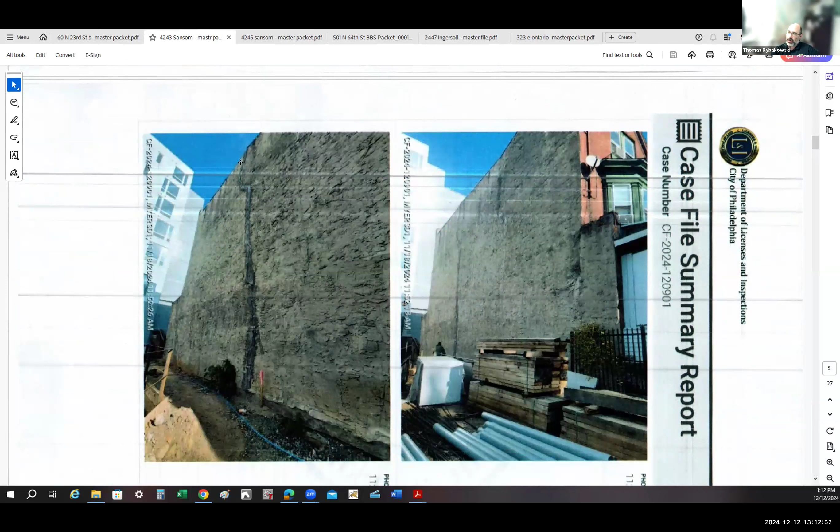Okay, so this is the property here, the photo on the left-hand side of the screen. This is the property at 4243 Sansom. This is the side wall of 4243, but the side wall of 4245 is the construction site, and the fracture runs from the foundation all the way through, up to the roof line of the property.

Tom, that construction site, what are they building there, a new house? It's a large construction site with an issued building permit that covers multiple parcels.

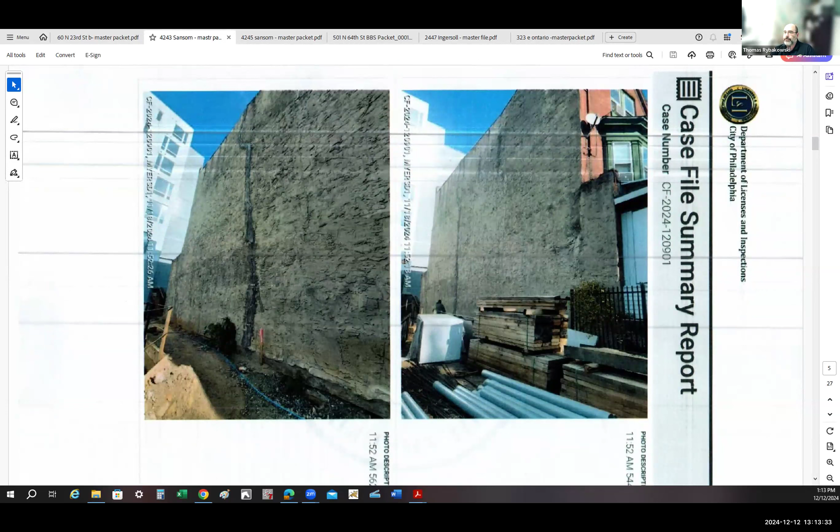Okay, that wall on the left-hand side that I'm looking at is fractured from the top to the bottom. Is that connected to the house next door? I don't see -- it is a house next door. It's the party wall between 4243 and 4245, which is not the vacant lot, but the active site. Yeah, uh-huh, okay, all right.

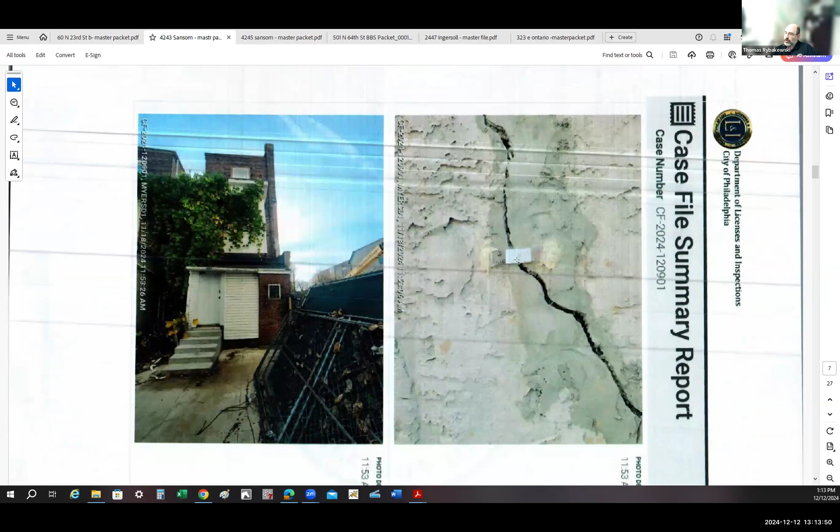Another illustration of the property and the fractures that are going on with that wall. And then you can see that there's a monitor on the fracture.

And then this is a close-up of the view at the roof line with a copy of the posting. I'll spin it. Tom, do you have a picture from the other side of that wall?

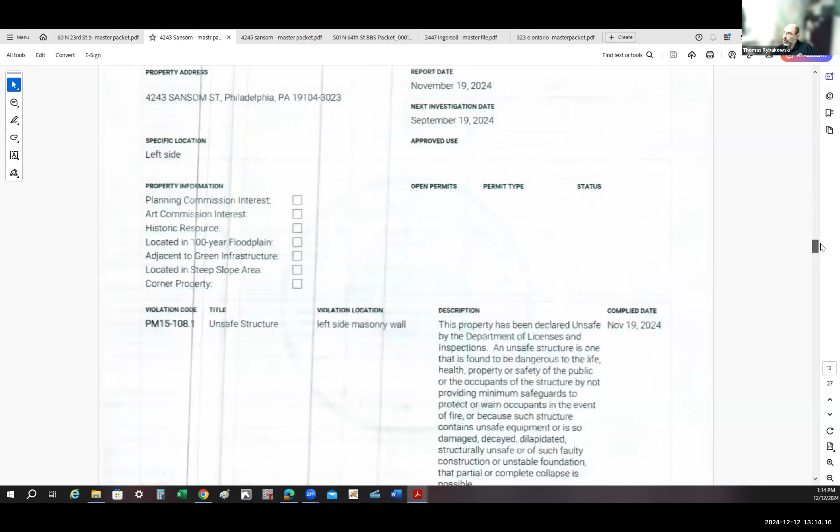That would be included in a report that the department received, and I believe it is part of the packet that is going to be brought into the matter in front of the board.

Okay, so essentially what we're looking for is the permit for the repair of 4243, which the department believes would satisfy the repair of the party wall of 45. I believe it's a matter between both property owners, but essentially we would be looking for a permit to be issued within 30 days for the repair of the property.

Okay, all right. Can I ask you a question? So the crack was there prior to construction starting? Yes. And then what construction had been done that it is now widening? Or do we think it's just a temperature change?

All we know is that the department was notified by the construction company doing the work out there that their crack monitoring equipment made them aware that there was movement and the crack was widening.

Tom, it appears that there was some patching of the crack at some point in the past. Was that done by 43 or 45, and has that happened during the time that the construction has been ongoing next door?

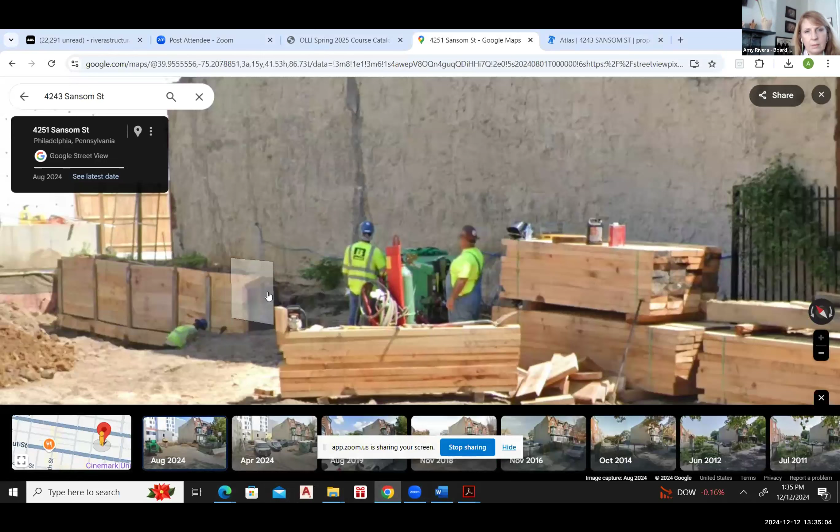Here's April of 2024. It looks like you're setting up for construction. In August of 2024, here's where that pavement was. This has been taken down. This soil has been excavated down. They are right up against her wall. Again, if this is just a crawl space, that wall's not very deep. You can't tell me that this has not potentially undermined it, subjected it to frost heave.

So you are not 8 foot away there. No, ma'am, we didn't say we were. We said we were 4 feet away. No, 8 feet. No, the new structure is 8 feet. We split the difference with the shoring. It's 4 feet. What is this darkened substance I'm seeing?

So the area, that building, and again, you'll see this if the engineer's report is presented, that building is a full basement. All the way to the back? Yes, all the way to the back. Right approximately where the gentleman is at the lagging wall bent over is the approximate location where we came across that piece of concrete.

The exposure that you see adjacent to the parging, or below the parging, is the remnants of the parking lot that was there, the parking lot and its sub base. So it is down a little bit, let's call it 1.5 feet or so. That was the sub base. We didn't excavate behind the wall, we're just doing a regular lagging wall installation there.

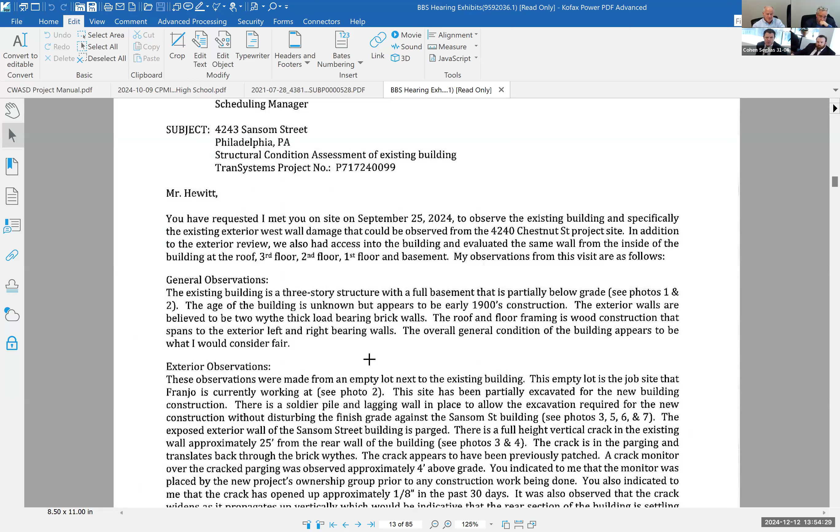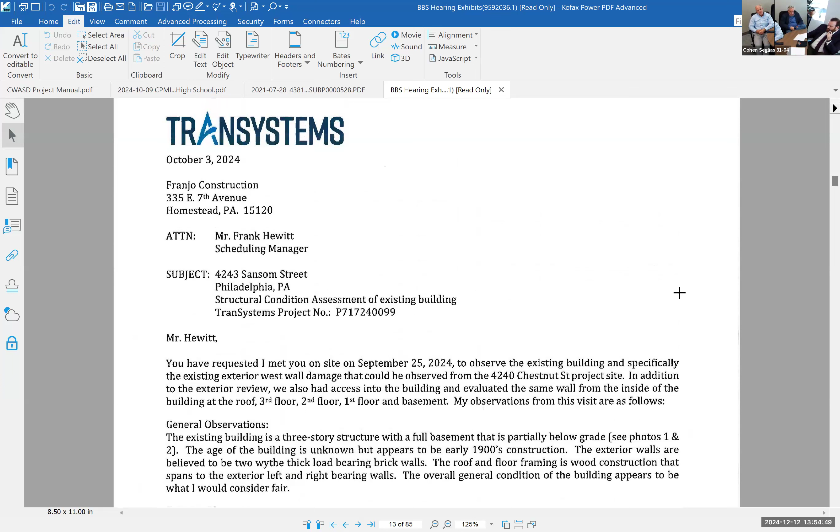Mr. Hewitt, this was submitted upon your request, correct? Or on behalf of Franjo? Frank, Frank - sorry, yes, yes. This is an October 3rd TranSystems report. This was uploaded to L&I upon the request of the inspectors at that time who came out after the crack monitoring. It goes through the general observations of the building, exterior and interior observations.

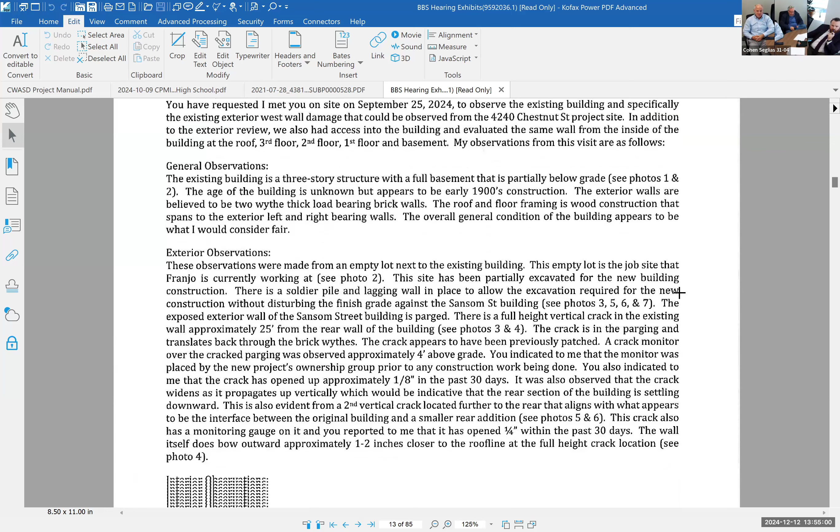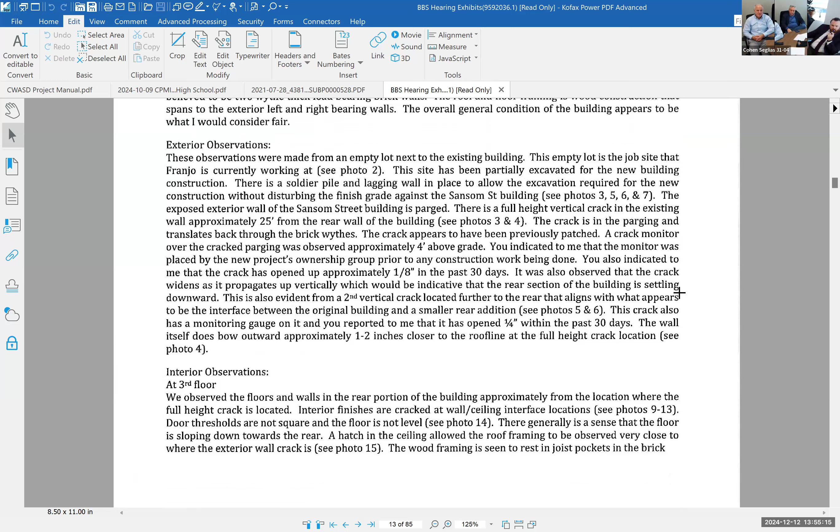Full height vertical crack in the existing wall, 25 feet from the rear of the building. Parging translates through the brick. Crack appears to have been previously patched - that's where the monitor was established. The crack propagates vertically to indicate that the rear of the building is settling downward, meaning to the rear.

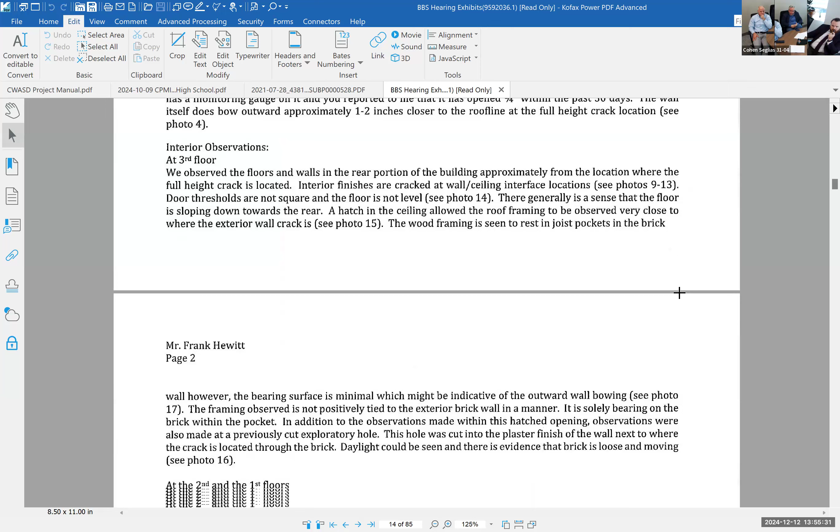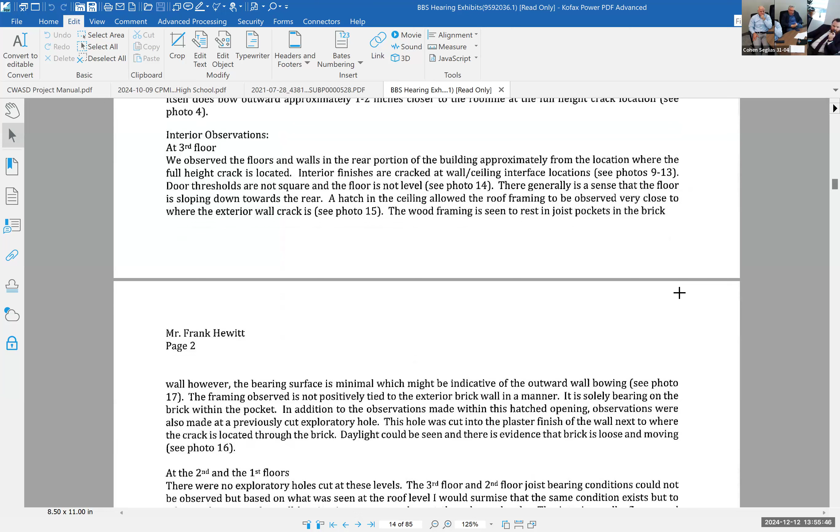Interior observations also included floor and walls in the rear portion of the property where the crack is located. The finishes, meaning the meeting of wall and ceilings, are cracking where the rear of the property is sagging. And we'll see in the photos at the end, there's actually where they did a cut through into the plaster to see the exact location of the crack from the interior at the roof line.

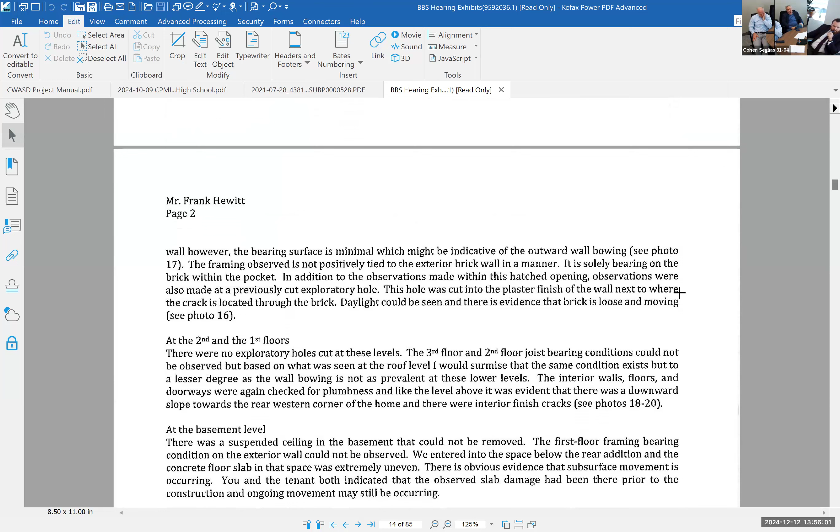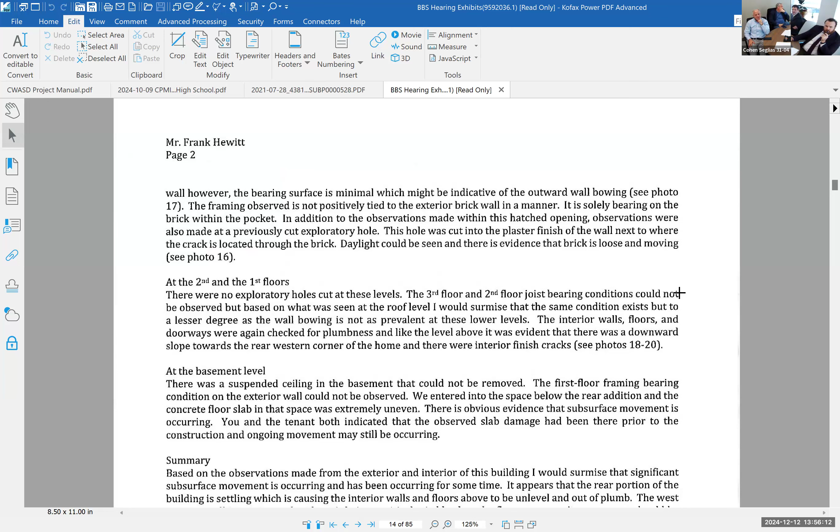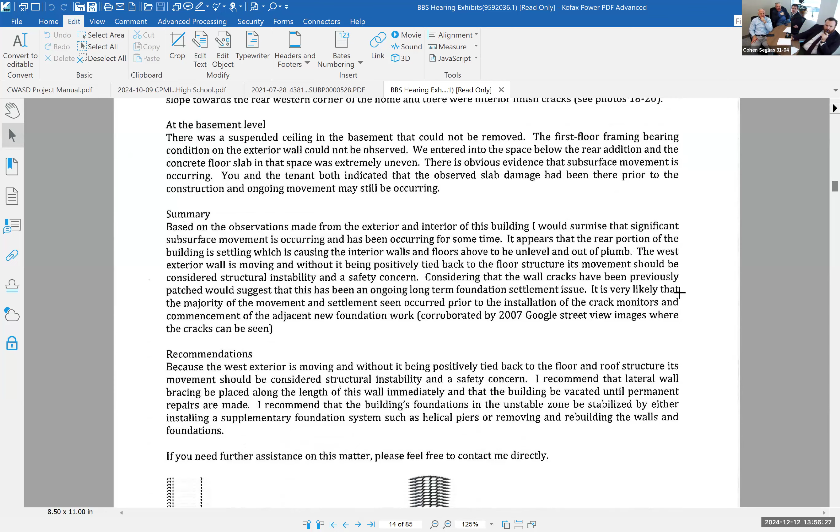The framing, obviously, in a structure of this age, since it is not with ledger boards, is pocketed, so it's not positively tied. And I think, as you will see in the pictures as well, they're not fully pocketed anymore. So if you just want to go through, that's the summary of the analysis: significant subsurface movement has been occurring for some time. Rear portion is settling, interior walls and floors.

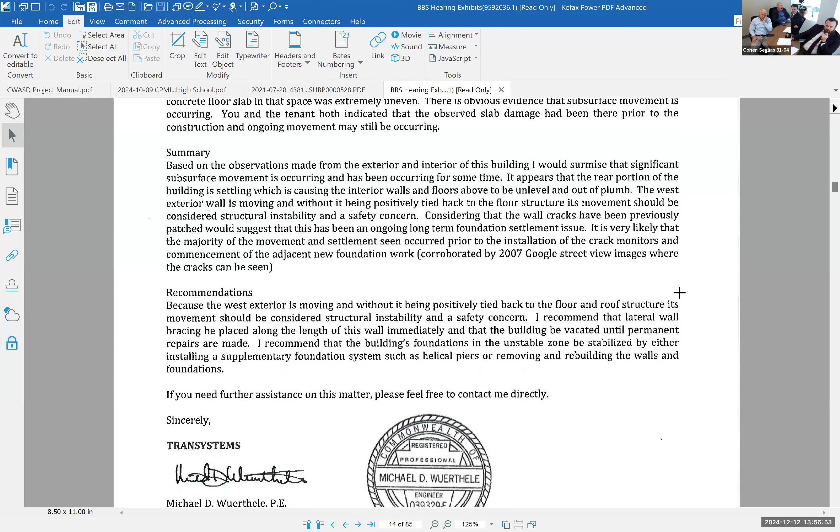Their recommendation was lateral wall bracing at the rear, vacating until repairs can be made. Foundation is unstable, and they were talking about helical piers and grout injection, I believe, was what was proposed, would be a solution to that.

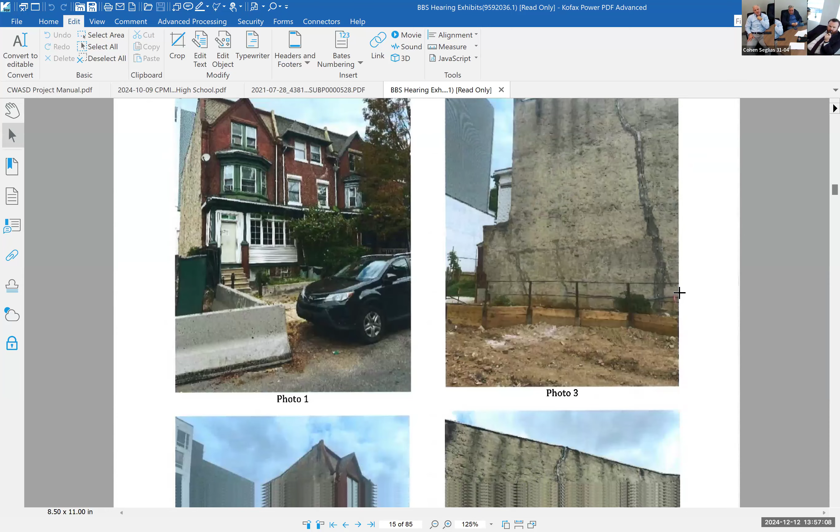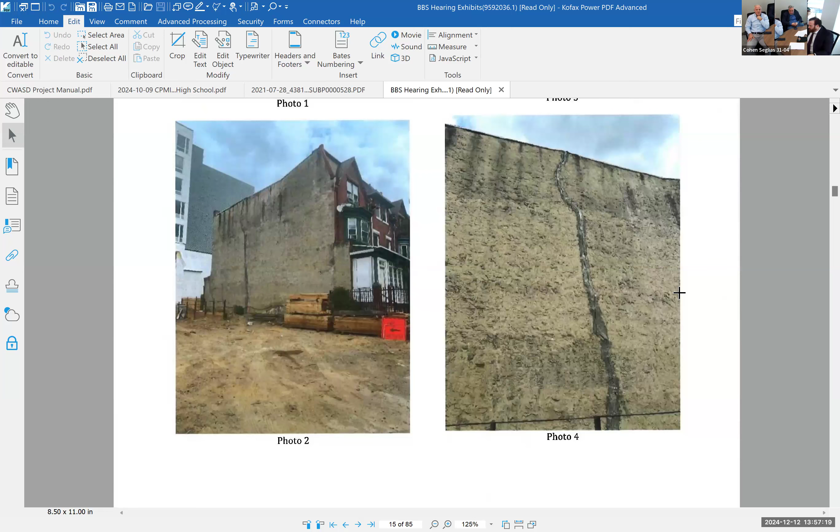If you go down to the photographs, similar to what the city has proposed, that's the front of the property. There is the rear along the shoring line, with the crack. Again, I don't know, Brian, can you zoom in to see if we can zoom in on photo one? The left, photo two.

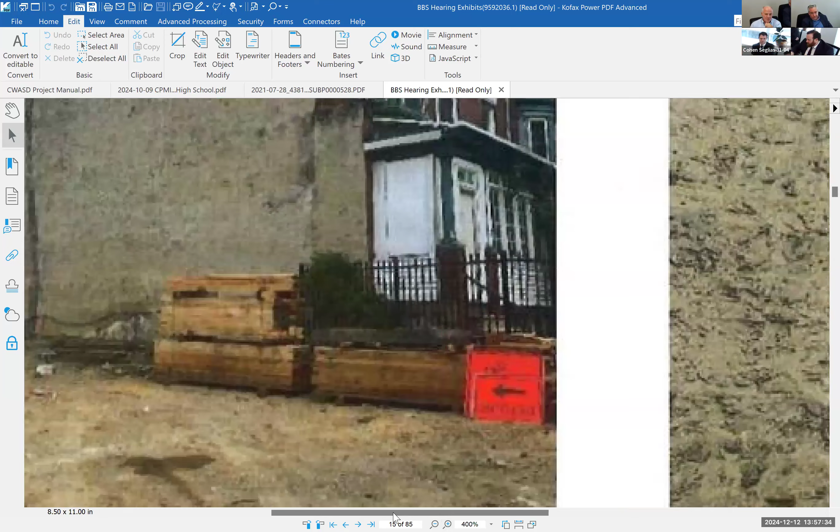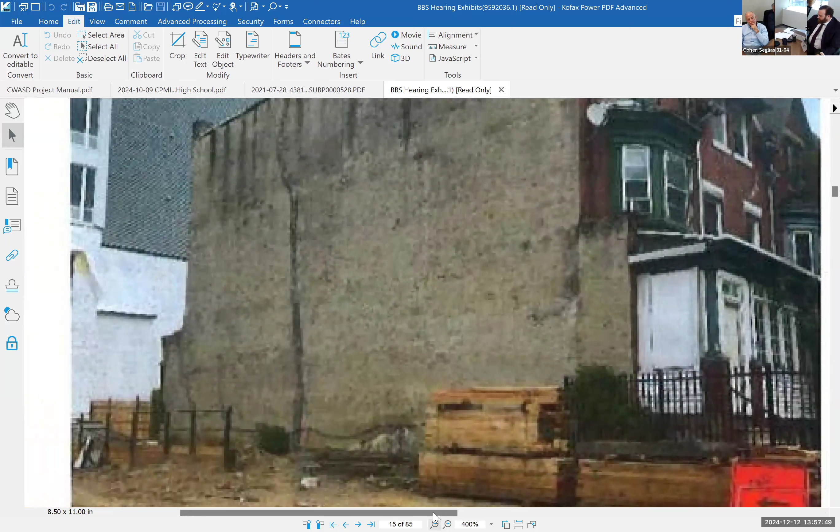So that is the crack, that is the shoring wall that was installed there. The grading and movement, the excavation of the foundation is obviously to the left of this photograph on 4245. The vertical crack there going down, let's see. You can see the secondary crack in the rear towards, I guess, what is that? Chestnut. Yeah, the Chestnut, that little outcropping wall, there's a secondary crack at that location in the same direction of the sag. Here's the rear of the property.

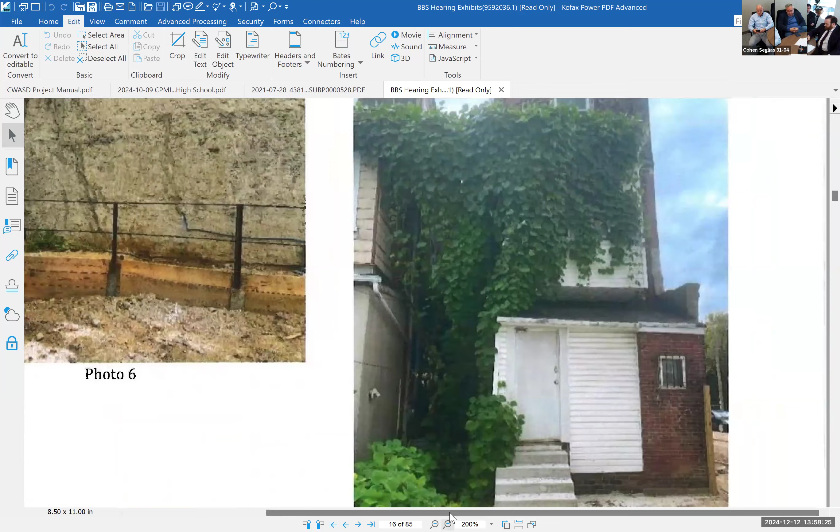Can you zoom in on that as well? Looking at the rear of this property, you can see at the time that this is existing improvements. The shape of the roof line itself is indicative of the fact that that sag has been there a while, because the millwork around the exterior rear door has been cut and trimmed, as has the siding, to show that existing sag. That's the door itself has a

Full height trim at the top on the left and is barely trim on the right, same as for the siding itself. So that's indicative of a pre-existing condition that's been there for some time when that work was done. I don't know when that exterior work was done.

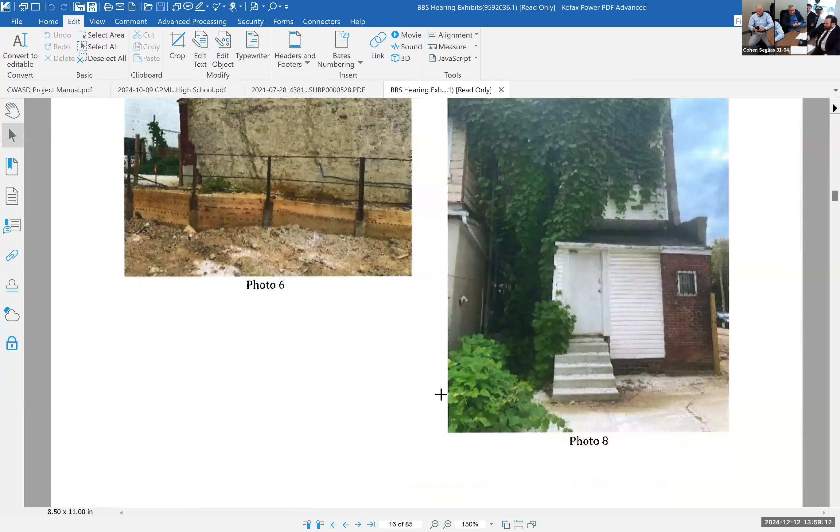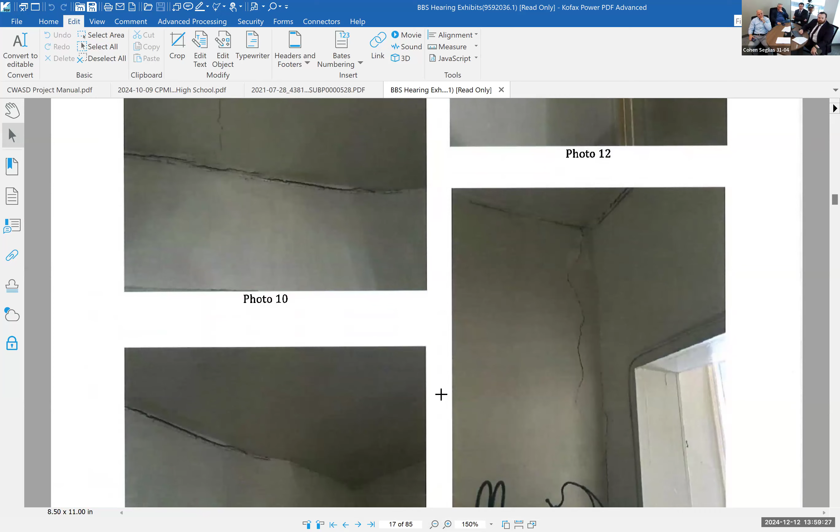If you go down further from here, I believe it goes into the interior of the structure, showing the existing cracking along the interior walls at the rear of the property, both vertically and horizontally throughout the rear. We have no idea what this property looked like prior to going in here. This was our first foray, obviously, into the property.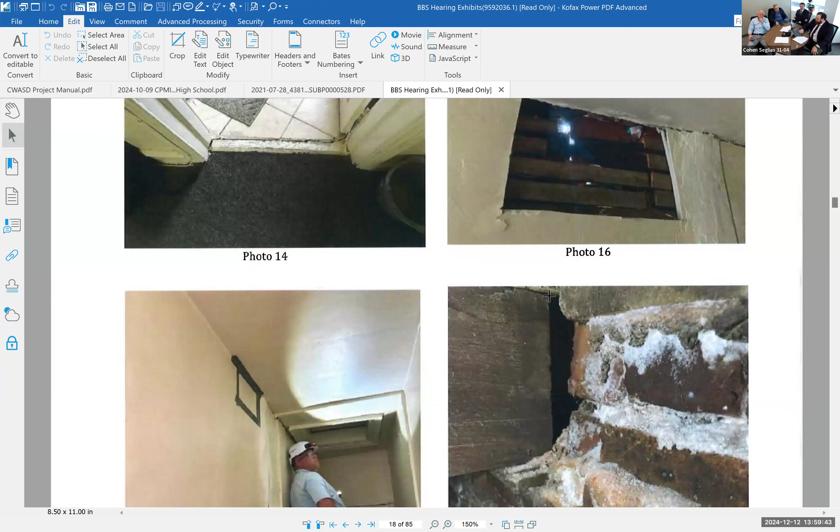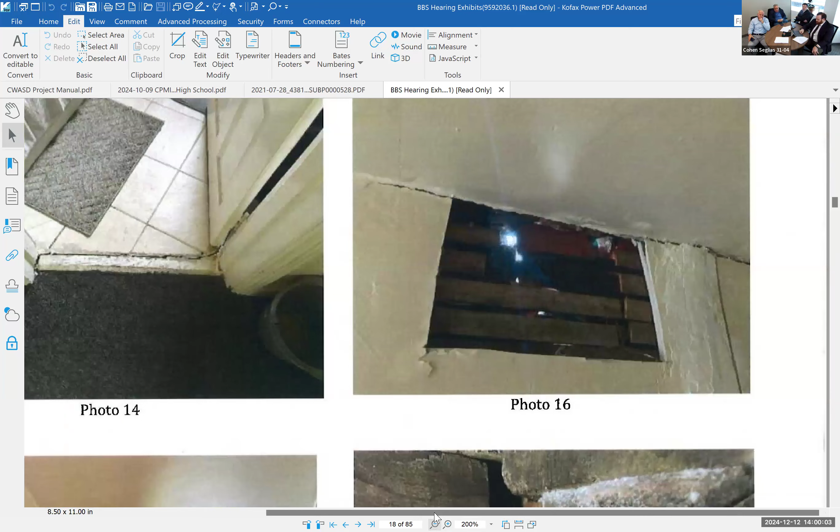That is the cut that was made in photo 16 through the plaster. And you can see the light. This is exactly at the point where the existing vertical crack runs to the roof line. You can see light through there at the very top of the crack at the roof line. And then if you scan further down, you can see what is evidence of displaced joists that have come out of their pocket.

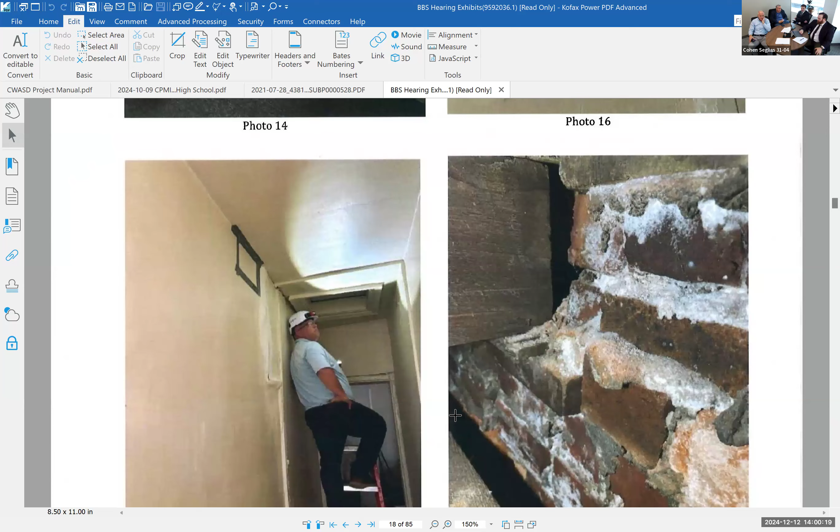Again, this is existing conditions, but that is not a fully seated joist. Is there anything after that? What's the last one that just shows further sag as the rear drops off?

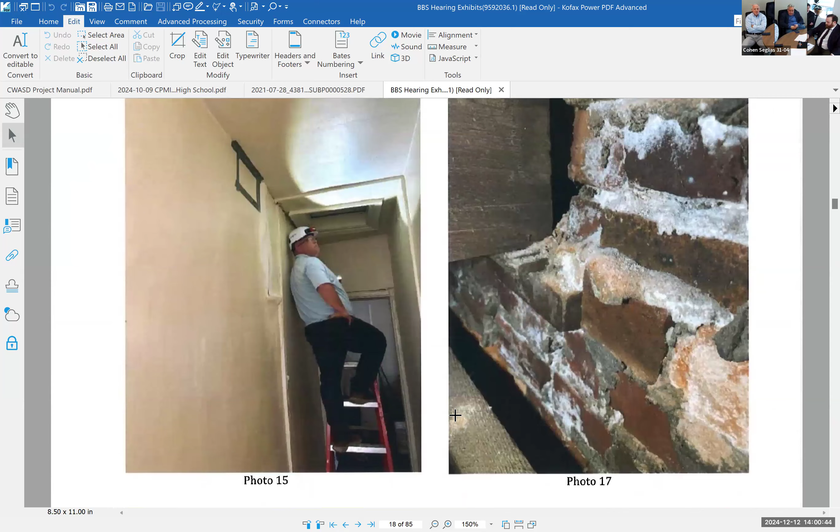So this was done at the beginning of October after consent was given to gain access for the engineer engaged by Franjo. And this report was submitted and has, I guess, been circulated to Mr. Coe, but is also available for the department on the Atlas system, or sorry, the Eclipse system.

Was the sheathing and shoring designed? Frank? Yes. So I apologize for the lag in response. We're next to a train track, so we mute by habit, so it takes me a second, sorry. So an engineer designed the sheathing and shoring? Yes. Okay.

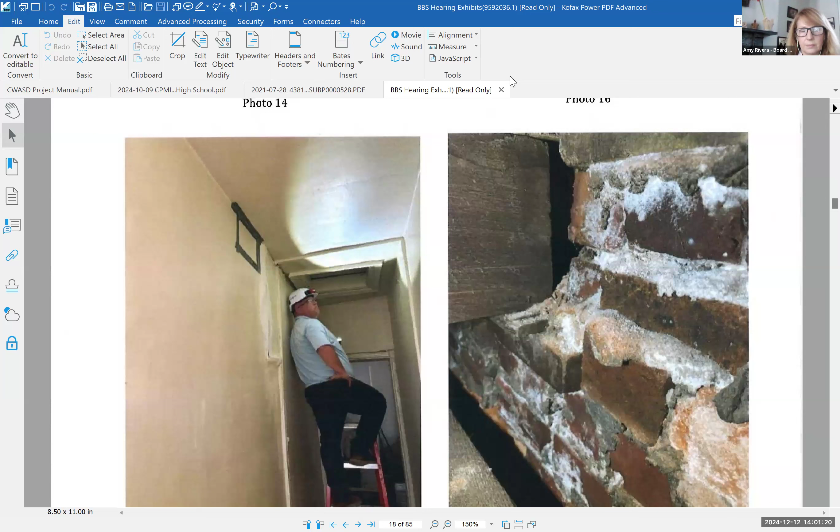All right, Wayne, do you want to caucus? Yes, I do. Okay. All right. Okay. One second here.

Here's our decision for 43 and 45. You've got 30 days to make safe, to get a make safe permit before you start the work. Also, the rear foundations that were dug up need at least 3 feet of earth cover to protect them from frost heave. So you guys need to work it out. You've got 30 days to get a make safe permit, and it's on both of you, 43 and 45.

Just to clarify, that's 30 days to apply for a make safe permit, to have it entered into the system.

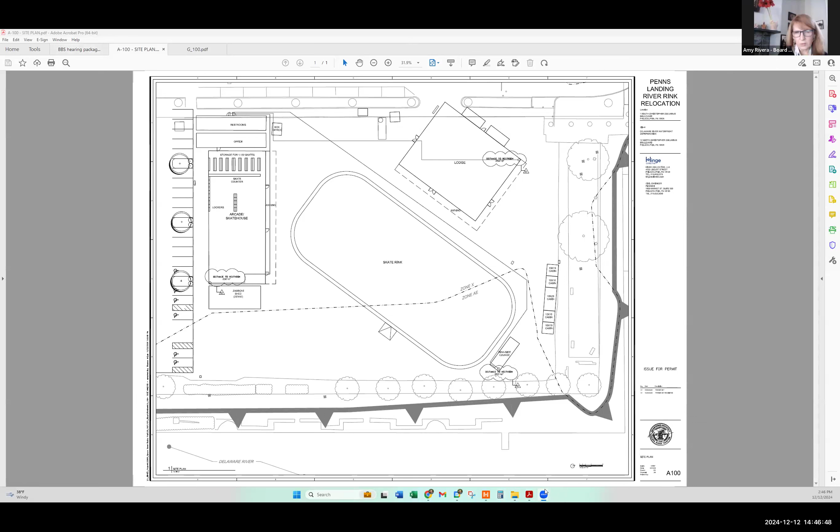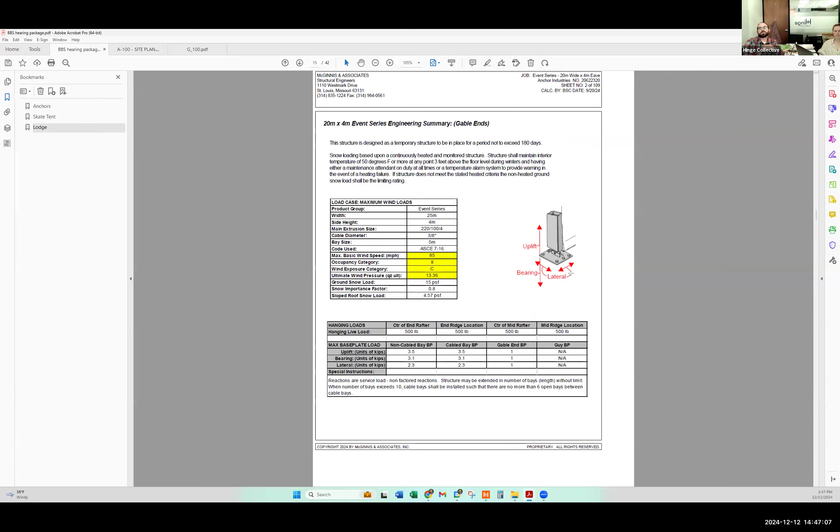And sorry for the trouble, Lizzie. Do you happen to have the pretty pictures? I do. Do those drawings show how they're holding them down? No, but this full set—this is actually even just excerpts from the structural drawings. This does have the full level of detail for structural compliance.

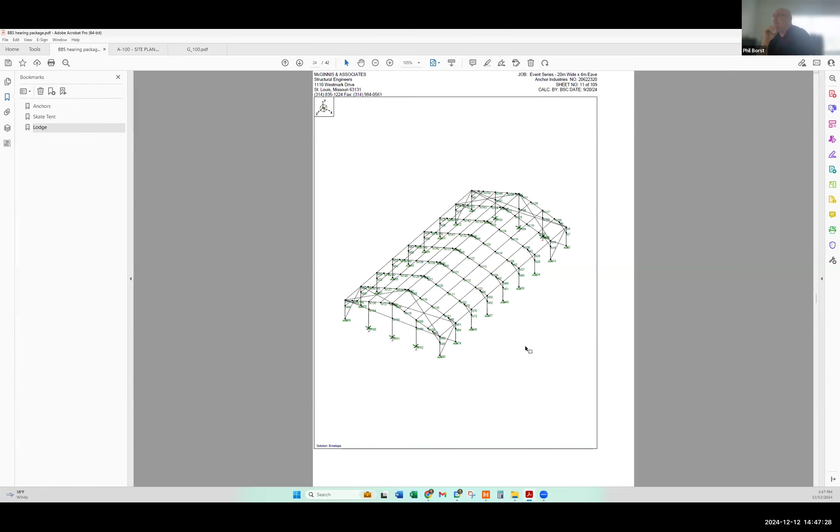And these are all in the Eclipse system if you want to review them in more detail. Yeah, please forgive me if we're not presenting as clean as you need for your time frame. No, and some of these tents have been up for a while already.

Yes, ma'am. The Lodge tent existed further south for the river rink for the past 12 years. We relocated it to the new position, and then the Arcade Skate House is a new tent that we purchased and put up from the same manufacturer, the exact same manufacturer, same spec, everything.

Were other variances required when these were put up initially? No, sir. Okay. No sir, it's just that I think with this go around, when we went in for L&I's approval, they wanted to clean it up a little, and they guided us through the process, and we spent about 8 to 9 months going through the approval process. And we got through, we got all the approvals. We were able to open, but we're currently open under a temporary because of this appeal.

So Matthew, did you review this? No, who did, which one? Because there's several applications, so I'll have to check. Who'd you guys review it with? So Ari, do you remember the contacts you had? So, Shakir Cohen was one of the reviewers. I think Shakir Cohen was the reviewer for this particular submission. Yes, for this particular application. For the two being appealed you have today, any notes on that?

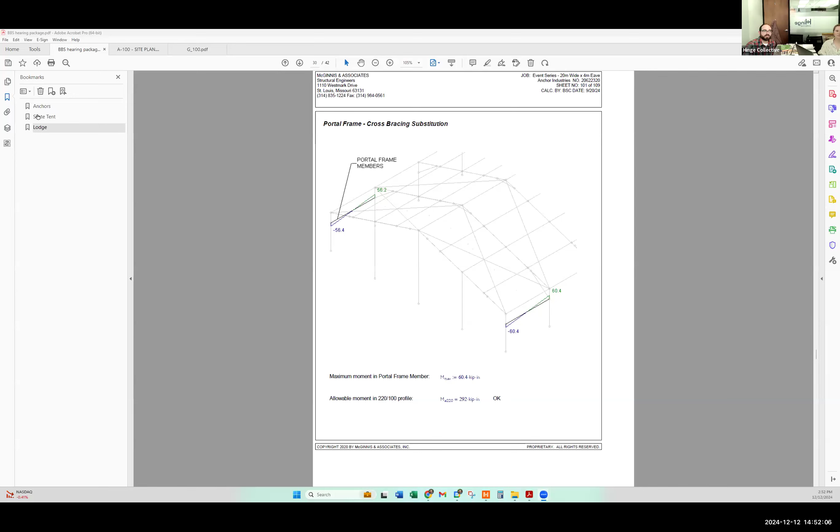Yes, I can answer that as well. They're anchored using these 3.5-foot spikes that also meet all of the wind load requirements when in a hard or dense surface, and they're anchored at every structural rib. So every rib of the frame has a column. That column has a base plate. That base plate has straps that bring down to the spike, and the spike is anchored in. It's like you said, 3.5 foot.

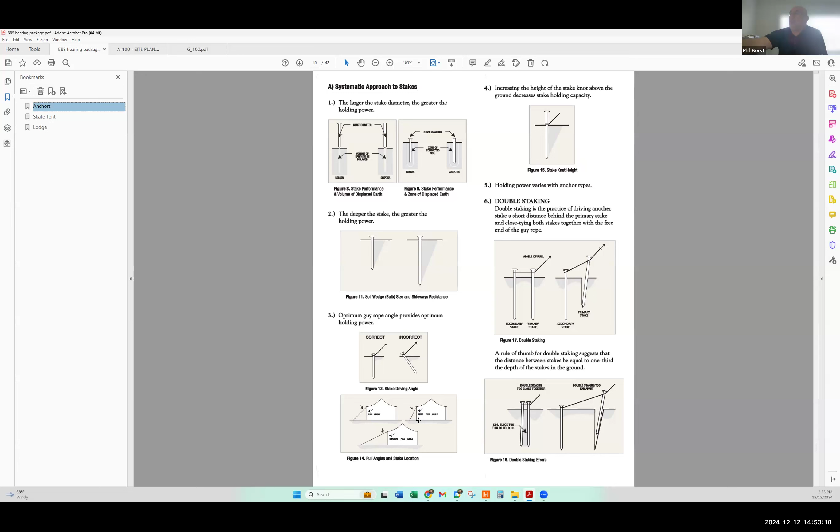So if you can go back to that image, that might help. There's like a double spike system here. Oh, and there's almost like guy wires also. Correct, yeah, it's in this fashion here. So the anchor plates are at the base of the column. If you look down at the lower left image where you see the tent, the anchor base that you saw, that plate resides at the base of the column. And then in addition to that is the spike and strapping that goes from the top of the column.

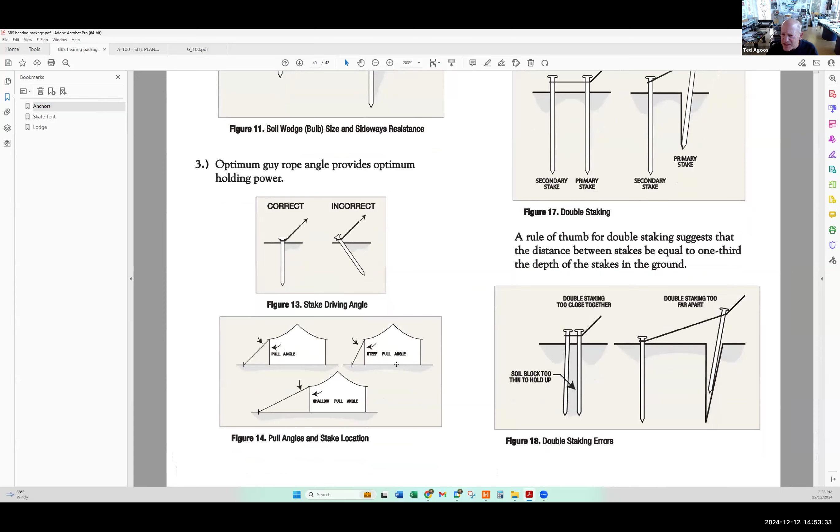Sorry, I was trying to zoom in there. When you were zooming through it, it looked like I saw 85-mile-an-hour winds as a sort of maximum, is that designed for? The pull-out capacity is 2,500 pounds in a hard or dense surface, which we would definitely qualify this as, because it's going directly into asphalt. That's only 2 inches worth of the 3 feet, but anyway.

And how much is the wind? What did you say, the wind's up to 85 mile an hour? Yeah, what's in his calculations? Somewhere in the front end it should say the wind speed that they designed for. Oh, are you talking about for the anchoring or for the structure itself? The whole structure, so it doesn't blow away. I mean, it will all funnel down to the anchoring, but I'm just curious if they designed it for the proper wind speeds.

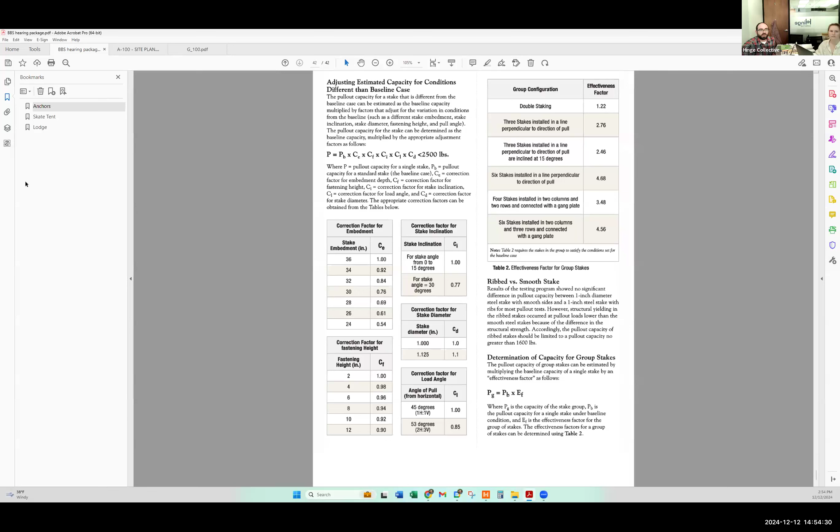Yeah, the uplift, yeah, the structure is designed for the proper wind speeds. The anchoring would be related to the uplift issue. And if they are 2,500 per anchor, then we're definitely exceeding that. Okay, I'm just looking for the wind speed at this point. It should be somewhere in the beginning. Yes, so if we go to wind speed.

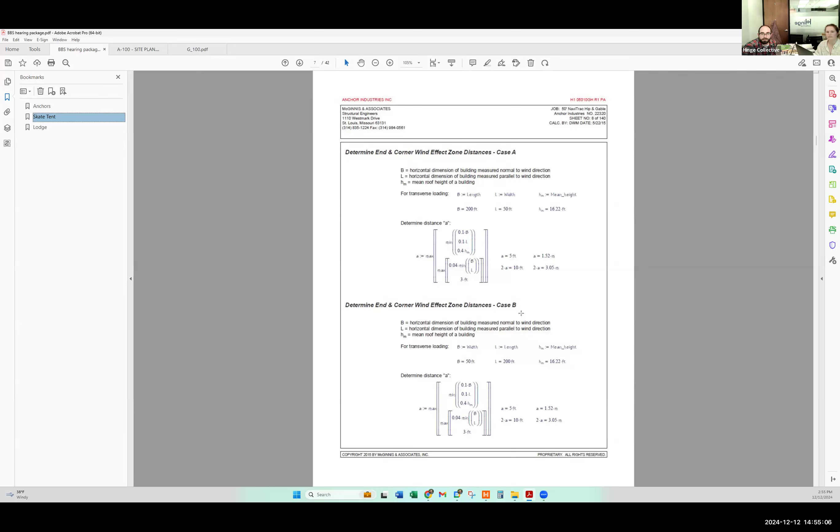There it is, the wind loads. Basic wind speed is 115. Okay, that's what I was looking for. All right, we good with it?

No, I think we should caucus. Okay, all right, let's caucus. Okay, sorry for the trouble, everyone. No problem, that's what we're here for.

Oh, they're back. Okay.

Is there anything in the report that says, taking the settlement issue into concern with the spikes and everything going through about 2 inches of blacktop? When you say concern, is it that there's gonna be something in the way? No, the settlement of the blacktop, right, Ari?

Right, the report that you showed, from what I could see, addressed wind loads and uplift. But your base plates are sitting on asphalt. You potentially have a snow load on them, a building load on a base plate that's sitting on asphalt.

Has that been signed off on by the engineer in the report? Are you referring to a geotech? That would relate to a geotech report, not, I'm talking about a base plate sitting on asphalt. A base plate that's supposed to be sitting on concrete is sitting on asphalt. Asphalt deforms, especially in the summer, it will deform. Has that been taken into consideration?

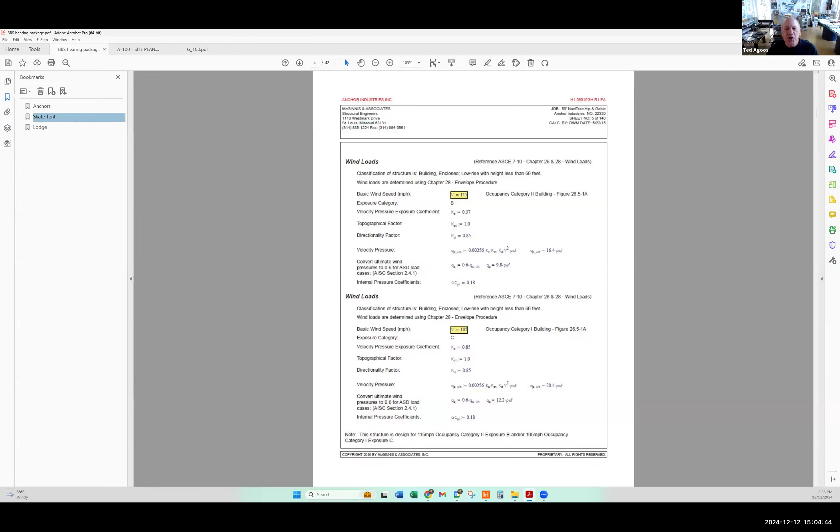So these tents, for example, they're prefabricated tents that get used all the time in different locations throughout the city. We're just using them for the purposes of these seasonal events.

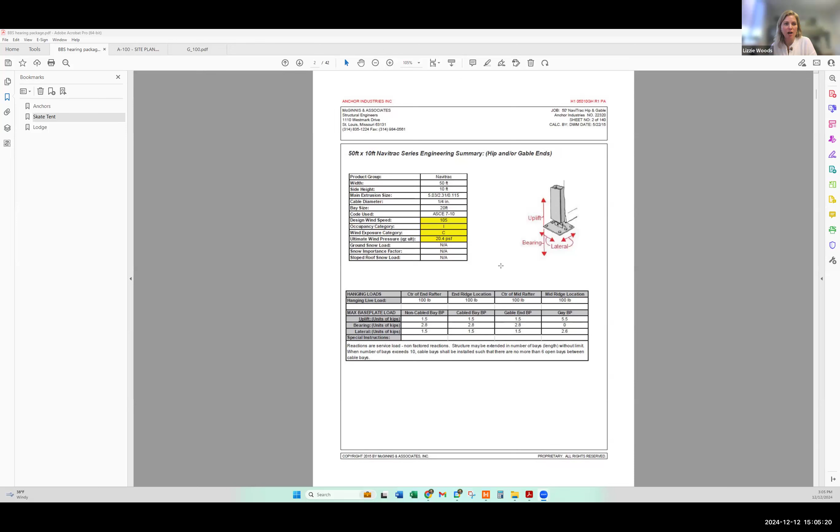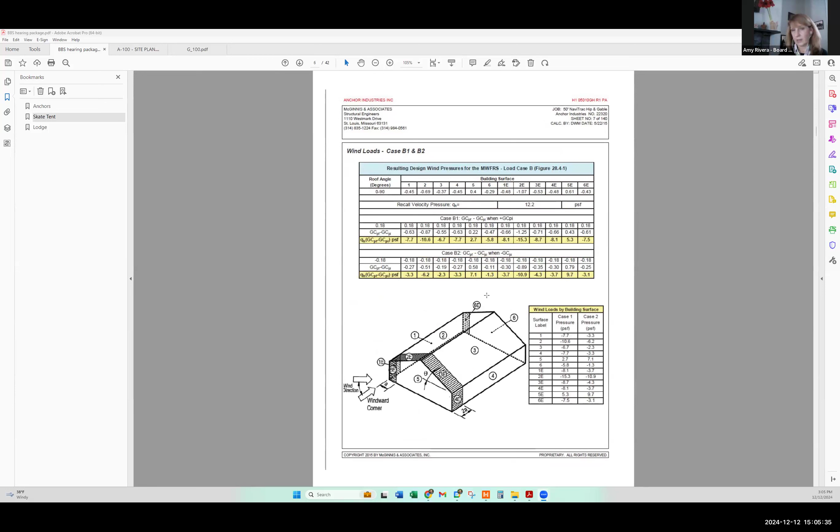All right, it says ground snow load is not applicable. Yes, it is. But the thing's gonna have snow on it. So if we got the engineer to account for the snow load and any settlement, I think this is where Ted was going. If we reviewed this with the engineer and said, does your analysis still hold, taking into account snow load and any settlement on asphalt?

Yes, we could share that information. Okay, and where do we share that? Do we submit that into Eclipse? And then how do we get back to this council? I think Matthew has to answer that.

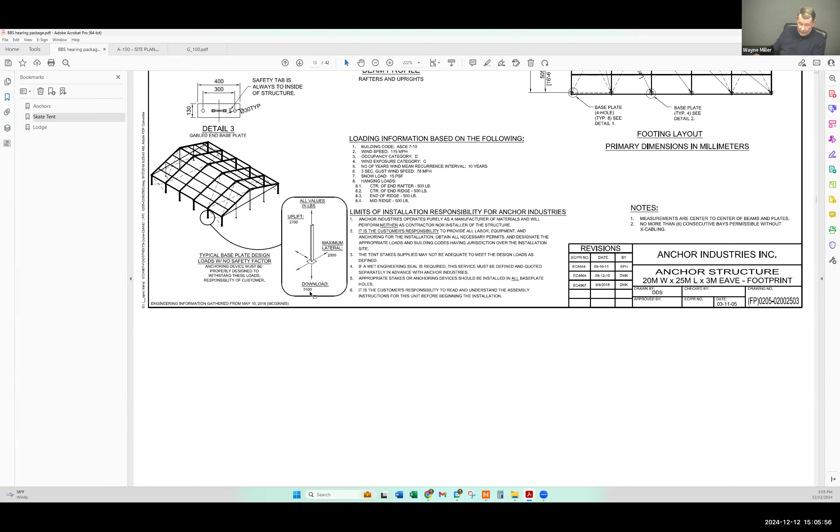Yeah Matt, what do you want, sent to you or sent to somebody else? And you don't have to come back in again. Ted just messaged everyone saying that it could be reviewed administratively. Yeah, you don't have to come back in. Just if it's the okay from the engineer, then we're fine.

Okay, but I think we need a resubmission because again, this said snow load is not applicable. This is up all through the winter, I think snow load is applicable. Yeah, again, forgive my ignorance, that's why I wanted to look at it. I wasn't sure what it said, I didn't know if it addressed snow or not properly.

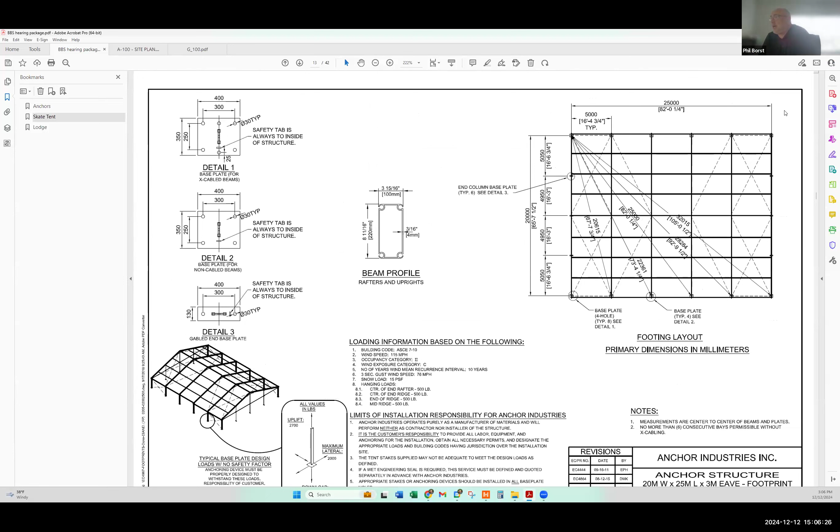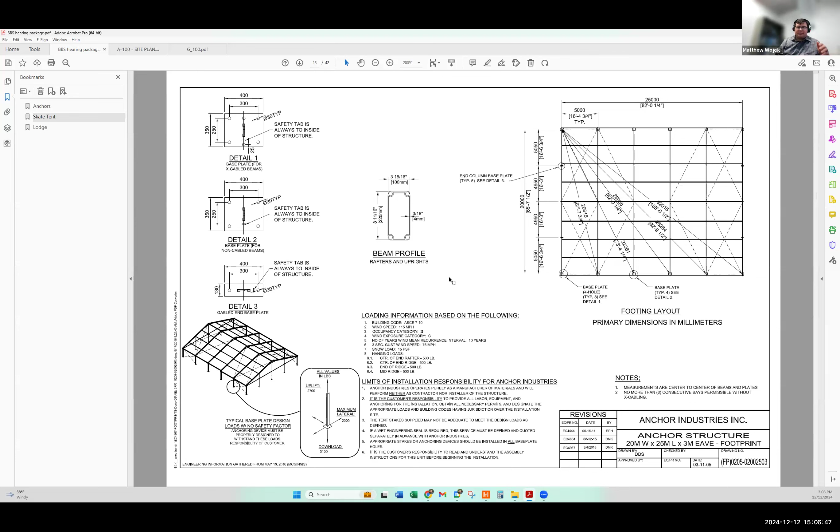So would we submit it to Mr. Matthew, or do we submit it just in Eclipse? No, just send it to somebody so they have it, so it doesn't get lost. Send it to me first, and then I can send it to the examiner so that they can look at it, or I'll just look at it myself. Okay, and then they would respond, and that would be our clearance if acceptable.

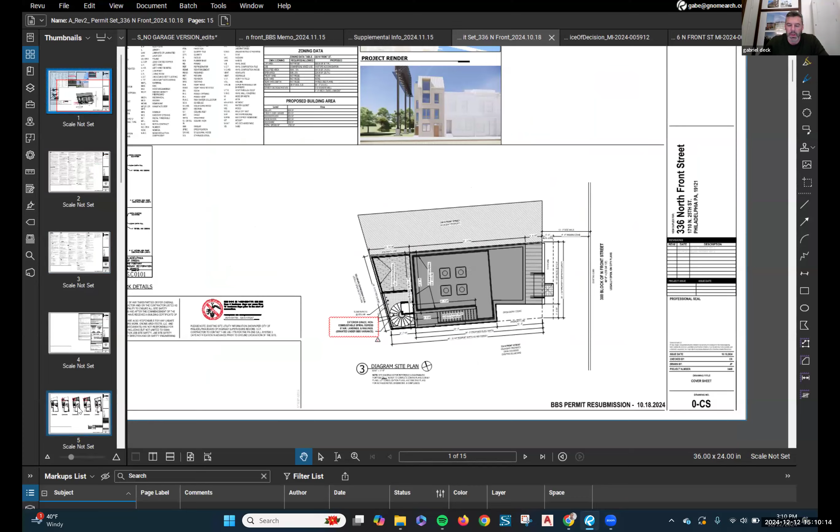This is the property where we were asking for short-term accommodations. We were required to have a second means of egress. It is a 3-story plus mezzanine structure. The drawings on the screen are actually what we've revised since meeting with you guys. If you recall, we had a single exit building arrangement with an interior stair tower, and we were required to have a second means of egress on both the second and third floors.

And we had discussed incorporating a spiral staircase off the back of the building, which we are working into the plans right now. During the hearing, it was my understanding that it was acceptable for this spiral staircase to lead into the Delaware Expressway right-of-way, which is behind the property, and make its way out to the adjacent right-of-ways at Callowhill Street or Front Street.

The refusal, or sorry, you guys granted the variances, and the letter that was provided actually required us to provide an easement through the property to the south of us, which I think contradicted what was discussed in the hearing. We're here to provide more supplemental documentation for what the Delaware Expressway right-of-way looks like in reality back there, as it does currently provide light and air and usable space and seemingly egress for a number of other buildings that are adjacent on the block.

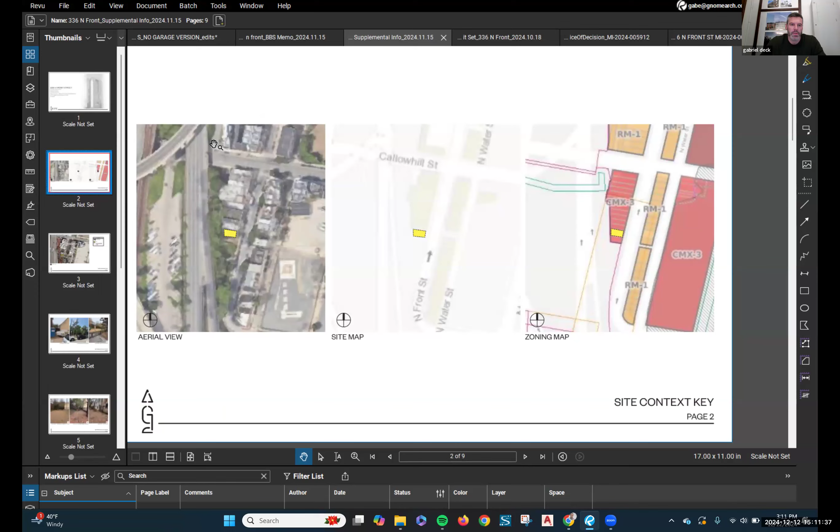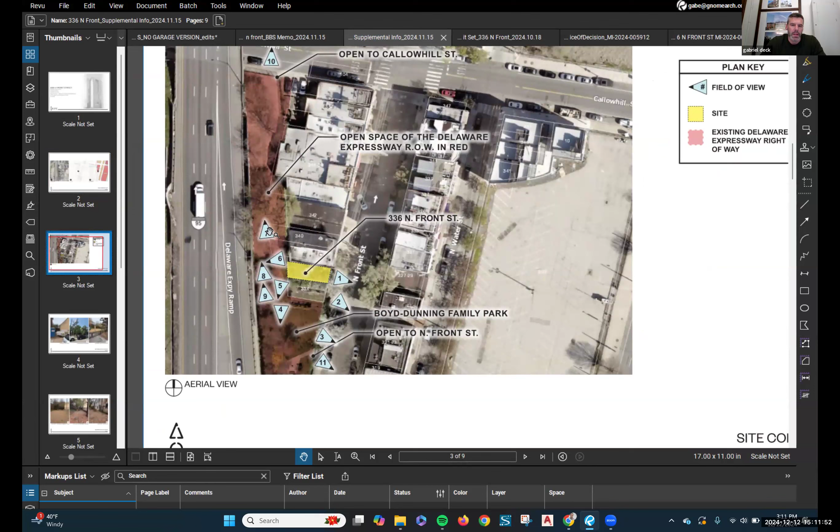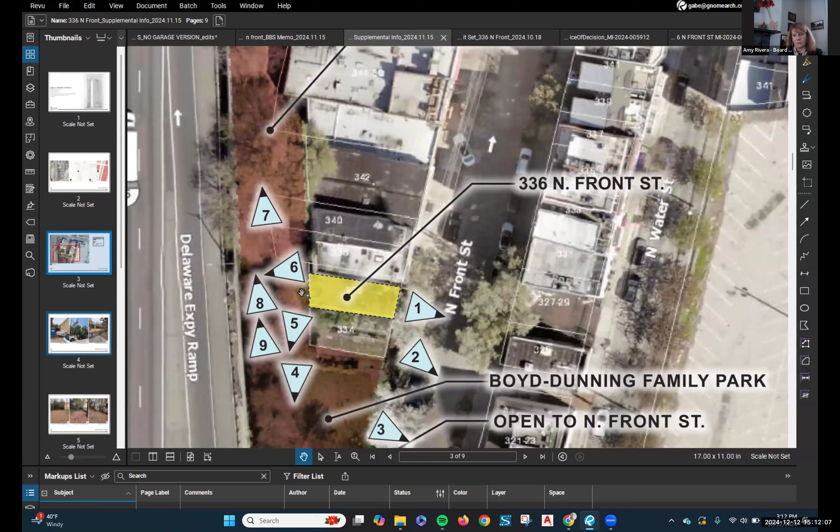So we've provided a supplemental documentation package just to help orient everybody with what's going on here. So we are the property in yellow. The Delaware Expressway is on the left-hand side, Front Street, and then Callowhill Street at the top of the page. Everything in red is the Delaware Expressway right-of-way, so our property, along with all the other properties, kind of backs up to it. And so what we're hoping to accomplish is the second means of egress, allowing us to just utilize this expressway right-of-way space behind the property.

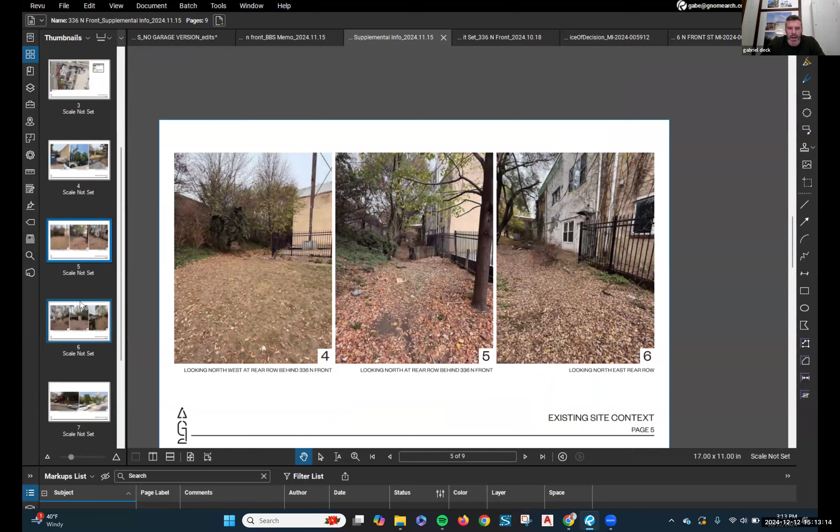Behind us, in the Delaware Expressway right-of-way, these are actual photos right behind our property. You can see in the middle photo the foundation of our property on the right-hand side, and then there's kind of a fence and gated condition. You can kind of see the adjacent properties next to us have windows and doors, and the expressway right-of-way is on the backs of these buildings. So we would be asking for a situation in kind with what's there right now. There's a number of other photos in the packet that was sent along that show the vantage point from other areas back here.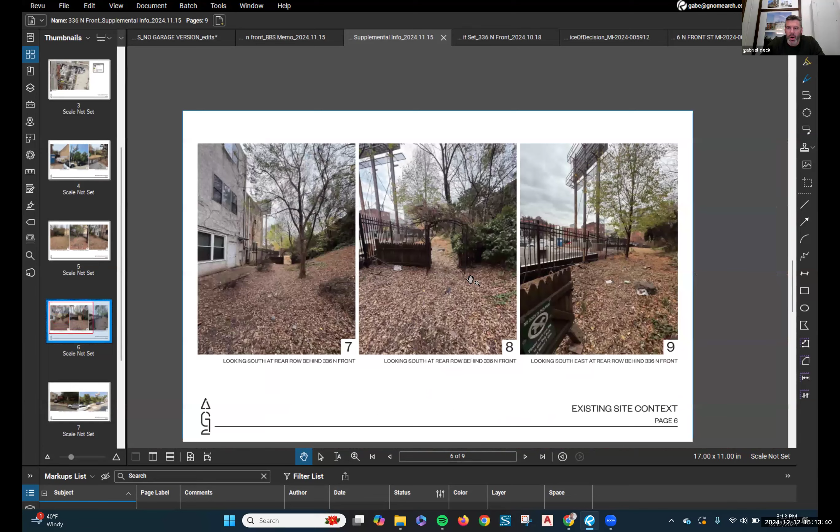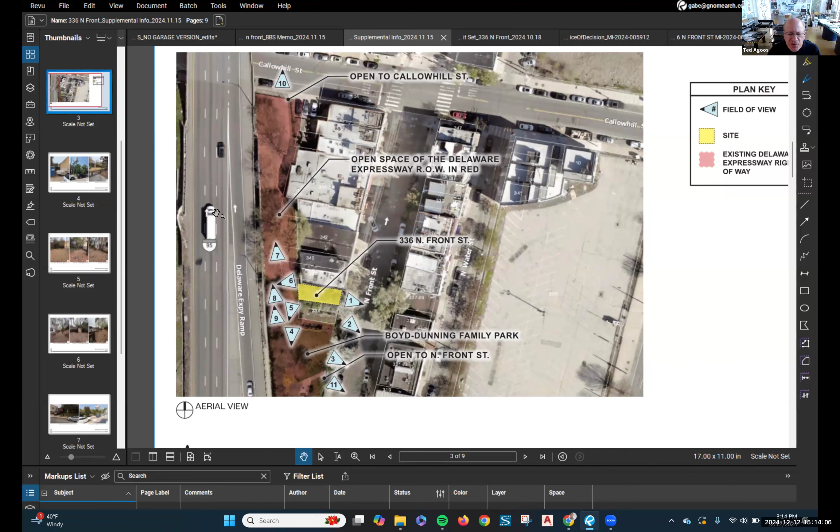So this is standing beyond in that right-of-way area. In the background is a gate that leads to the back of our property. All this is to say that there's a lot of ample space back there, and all of this space dumps you back out onto Callowhill Street at the top of the screen, and also onto Front Street at the bottom. There's open vacant land that is part of the Delaware Expressway right-of-way right behind us, and we're hoping to utilize that as well for the second means of egress we've accommodated into the structure. Is that gate that you showed always open, or is it ever closed off?

So the gate that is in the photos, I can't say if it's always open or closed, but even if it were always open, a lot of the residents take their dogs back there.

So, Gabe, I'm confused. The buildings that are back there, are the back walls their property line? It seems to be that way. When the Delaware Expressway right-of-way was created, after these buildings were constructed, it seems as though the lines were struck right at the back of the buildings for the new property lines.

Do any of them have back doors into that area? Yes, like you can see in this photo, there is a door there. And Roy, I believe you have another building on this property that maybe has a door going back there? Yes, 342 Front. And it looks like the neighbor next door took the liberty of that fence and grabbed some of that land?

Maybe, I can't speak for sure. Majority of the properties on the block, all of them have doors back there.

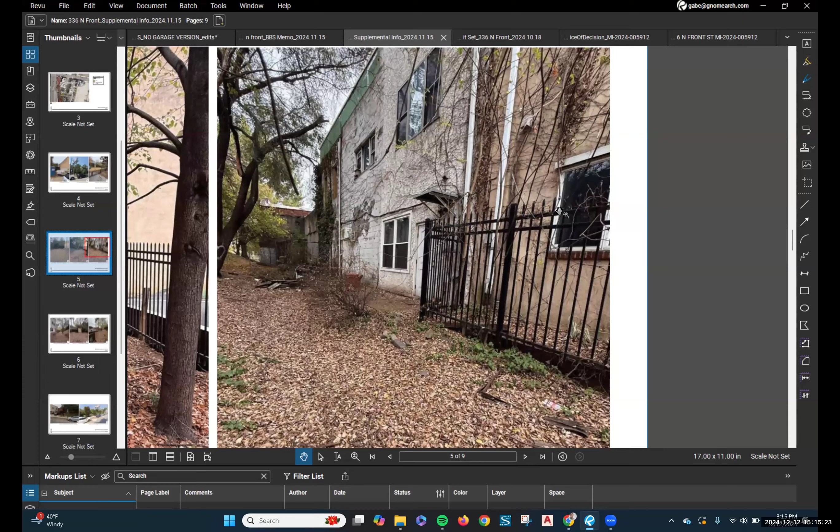Yeah, and here's a few more photos to show the aerial condition and that property line. If you look on Atlas, you can see the expressway line just along the backs of the properties.

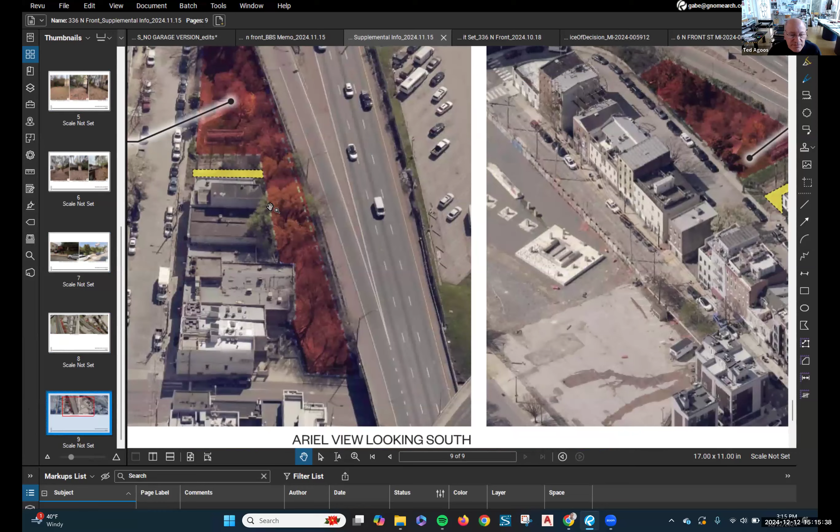Yeah, I think our concern was it's fine as long as it's always maintained as an open-air area that gets you to either street and is not closed off. But what would happen if they were to just fence it off, so in spite of people's back doors, you couldn't go out there?

And that's why I think we were looking for some kind of easement or letter of agreement providing sort of perpetual access.

I guess in the event of an emergency, someone could get back there, even if it were capped off or fenced off at the far ends. Occupants could, in theory, make their way pretty far away from where a fire is taking place, because all of that's just wide open back there.

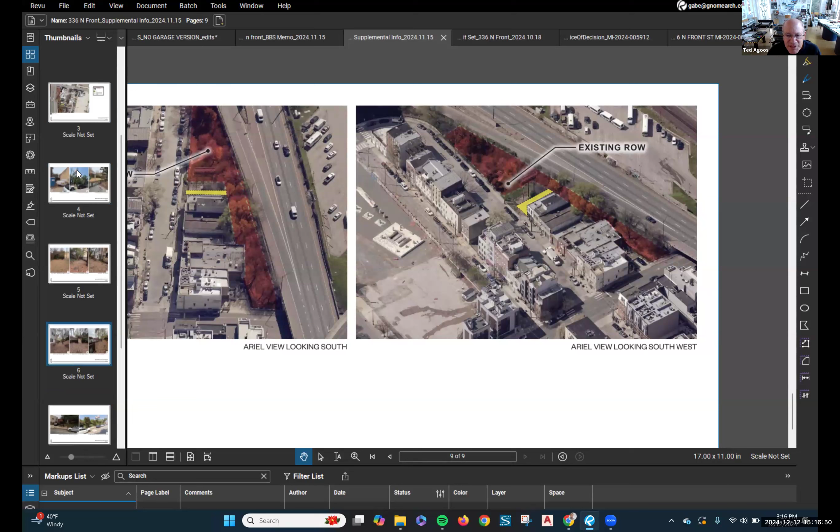Yeah, no, we understand the way it is now. It's just the what-ifs, but not that anybody's planning to do anything other than possibly develop further south of you.

Beyond the billboard site, I believe, and Roy, that's like a park at the bottom end. The Boyd-Dunning Family Park is right at the bottom end of it as well.

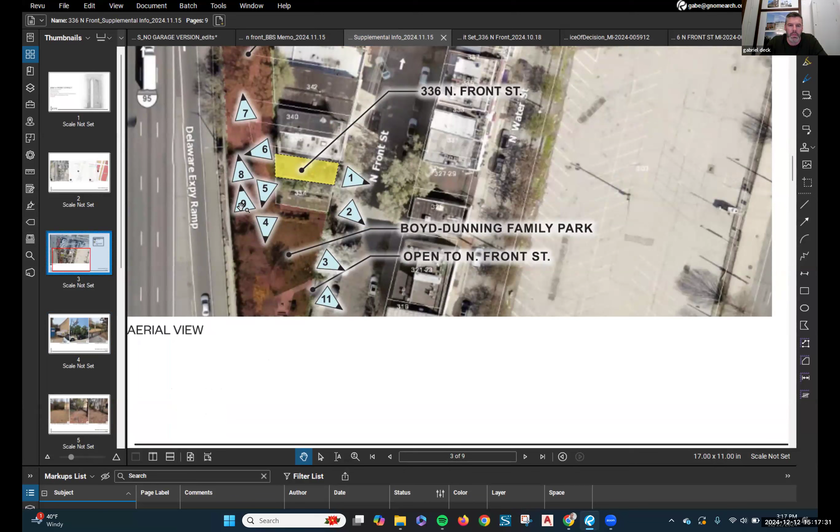So seemingly with that existing, it suggests it should be there for a while. I can't speak to the plans of the city for the expressway right-of-way there, but that zone behind our structure to the expressway, I would imagine, would not really get developed at minimum.

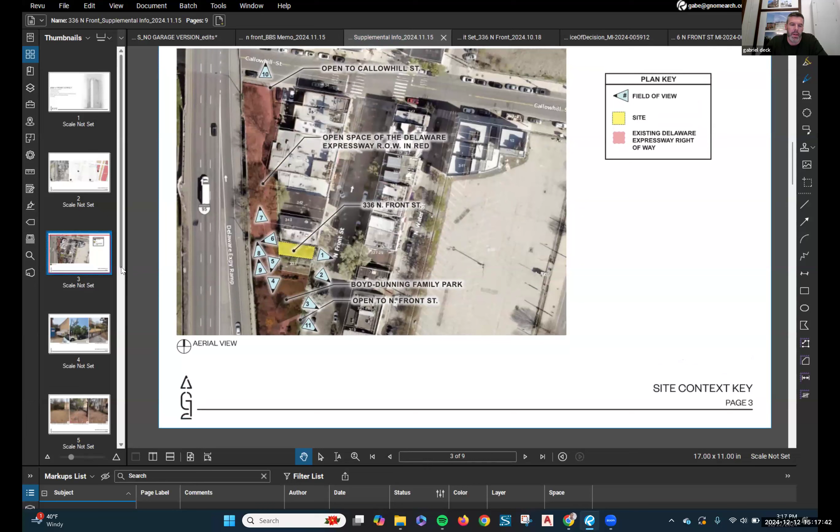But beyond that, we've revised our plans to now incorporate the spiral staircase elements that would connect each of the units, so now they have two ways out of the building. We have a 2-hour rated enclosure for the single staircase. And again, these units are only about 400 to 500 square feet at most—they're all pretty small, as the lot is very, very small.

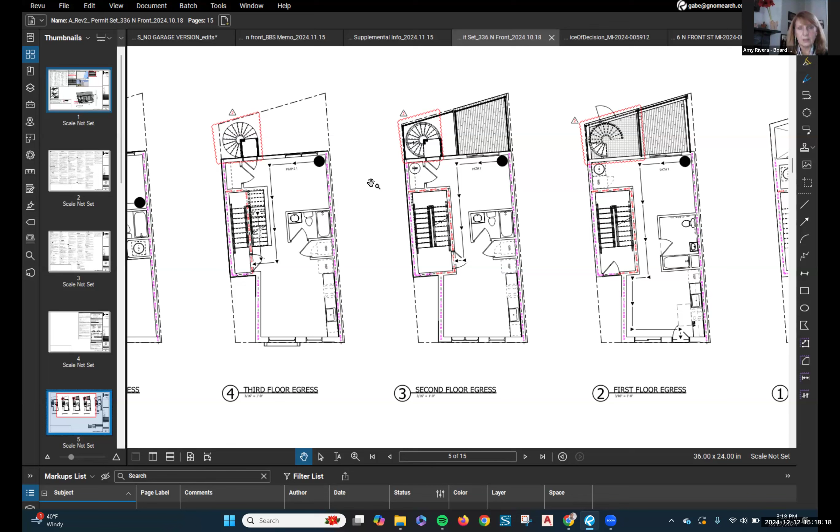So if you were able to get out the back gate, you're able to pass the fenced-in billboard area, correct, and get to the little 2-foot-high fence along Front Street? So yeah, this is the little 2-foot-high fence. Right, that's where you can lead directly to.

If you look beyond, that's kind of the way back there. And that corner of that gate is the back of the billboard property? I believe, yes, that is correct.

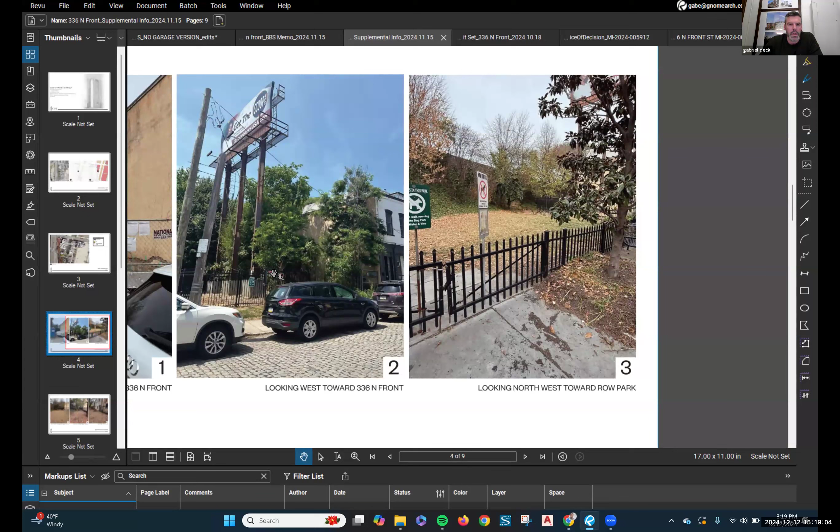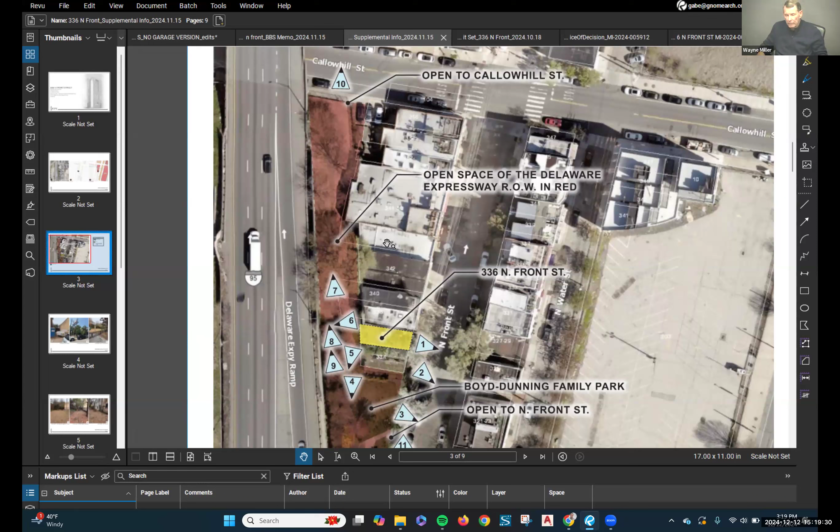How long is that from one end of the buildings to the other, that back area? Are you asking for the open land? Yeah. Well, if our property is roughly 16 or 17 feet wide, they got about 15 other structures multiplied by that, so it's a few hundred feet. 17 times 15 is 250 feet roughly. That might be the distance from our property to Callowhill Street if you're going back there. And then going towards the dog park, you probably have 50 to 75 feet to get to where that small fence is.

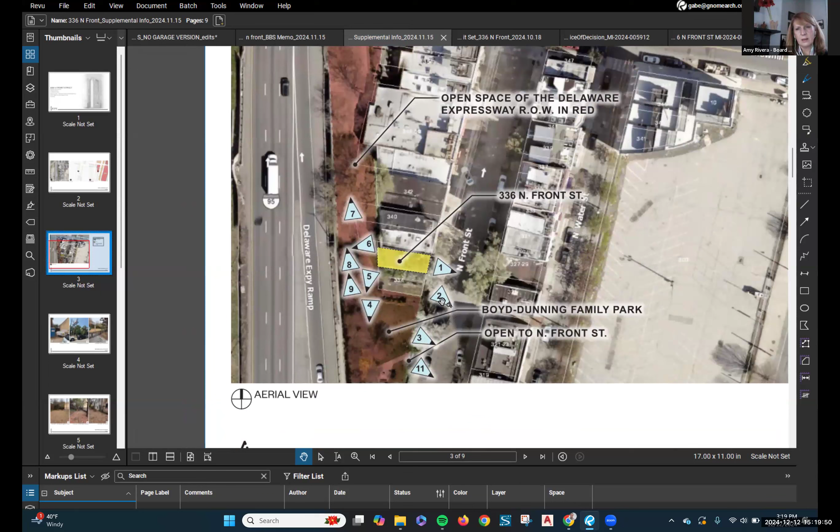Okay, if you get all the way out to Callowhill, is there a fence there, or is that open? Says open to Callowhill. I know, that's why I'm asking. Yeah, so this is the Callowhill side. There's a fence there with a gate. That's open, right.

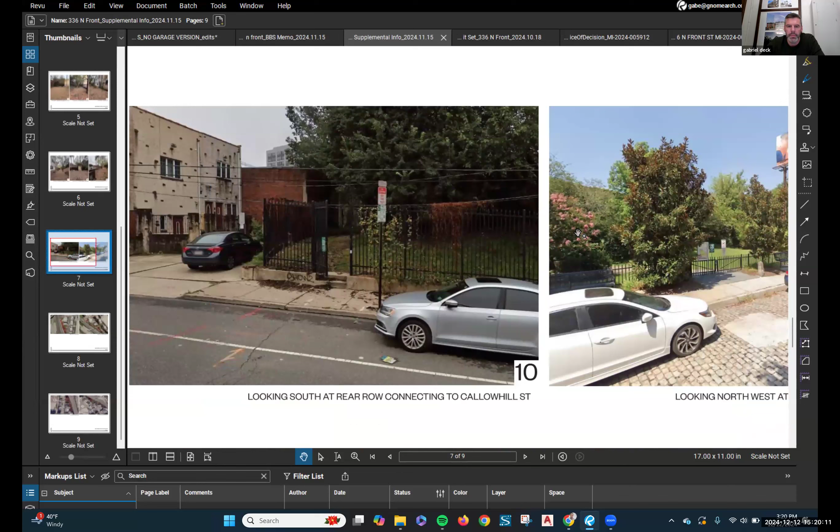Yeah, I think what we've talked about in times with landlocked rear yards is being able to get 50 feet away from a fire in their building, which you really can do in either direction. You're short of somebody restricting access.

John Dimes? Can you hear me? Yes. Yeah, we need Dimes. Oh yeah, I'm sorry. Yeah, I don't have a problem with it.

I'm not a real estate expert, isn't it? Isn't there some sort of real estate law once you start using some form of property for so many years, you kind of have rights to it, or easements created, if everybody's been using it for a decade or two? I don't know. Again, this is not advice, but the 50 feet, it looks like whether or not they can get to a public way or not, it looks like, I guess we could see dimensions on that or travel distance. Can they get 50 feet away? Yeah. Even if somebody fenced that in and they couldn't get to a public way?

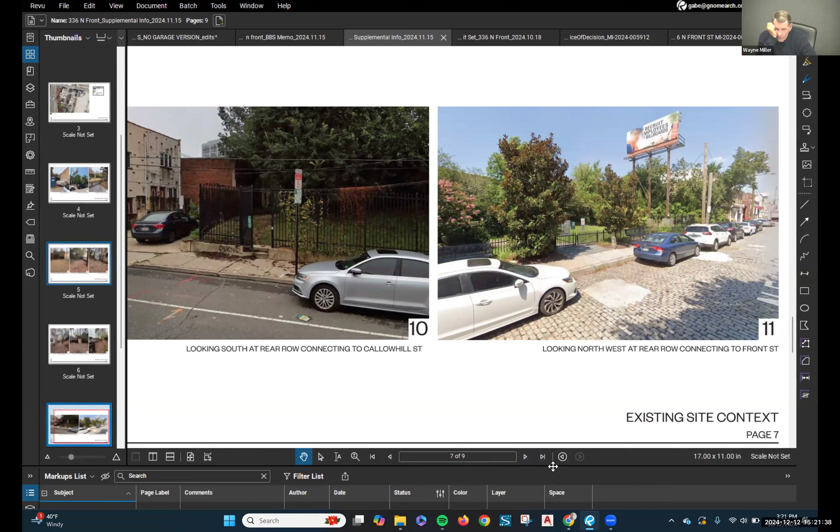Still got 250 feet on one end, right? Yeah. I mean, I could pull it up on Google Earth and use the measurement tool if you'd like me to do right now. No, you don't have to measure, that's okay. Yeah, based on that, I mean, I would be okay with it.

So, all right, everybody okay? I think we should caucus. I think we need to caucus. Okay, yep, all right, we'll caucus.